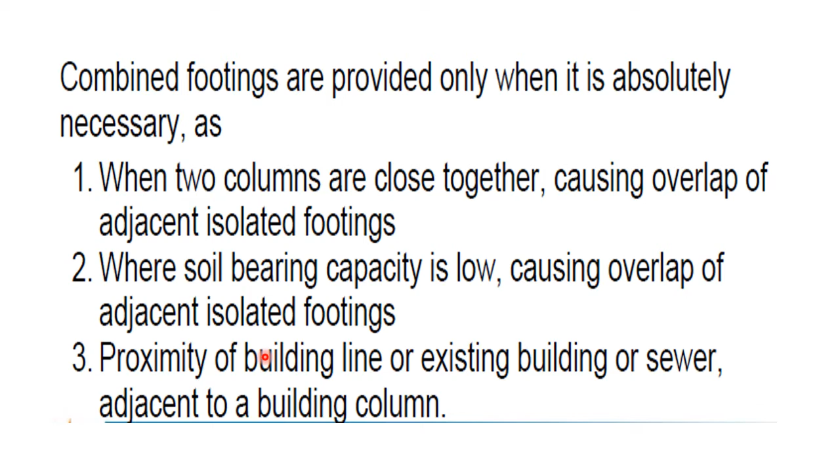And when the isolated footing area is large, it may go beyond our limit, beyond whatever border we have. There may be other constraints, such as sewers, where we cannot provide separate footings. In such cases, we go for the combined footing.

Now, based on the loads coming on the columns, the shape of the columns, and the position of the columns, we provide different shapes of combined footing. It may be rectangular if the loads are uniform, or trapezoidal if the loads on the columns are different—more area and length is provided to the column with higher load, and less to the column with less load. Or you can even go for a stepped kind of footing.

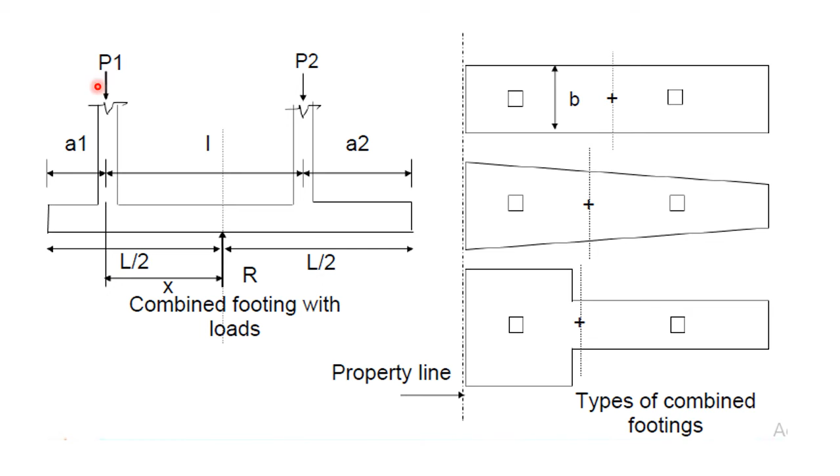Similarly, there are different ways of providing the combined footing. The first way is the slab type, where we connect the footing with the slab. This is not recommended because the thickness as well as the dimensions become larger and larger, so usually this kind of footing is not used.

The second one is the slab and beam type. This is most recommended. Here we provide a slab at the bottom, and the two columns are connected to each other with the help of a beam. So both the slab and the beam will be present below the ground level—this is the slab, this is the beam—and this is the most recommended type.

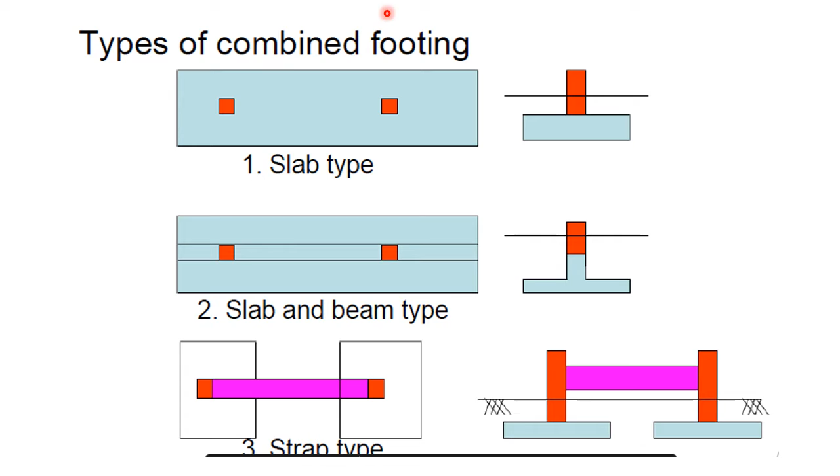Today, in the detailing of combined footing, we will learn the detailing of the slab and beam type of combined footing. One more type is the strap type, where two columns are connected with the help of a large depth beam provided above the ground level. So these are the different forms of combined footing.

Now, based on the presence of moments, we decide where to provide the reinforcement. When it is a combined footing like this, there is tension at the bottom, so you have to provide tension reinforcement at the bottom. Here also there is tension at the bottom, so tension reinforcement at the bottom; whereas here there is tension at the top, so you provide tension reinforcement at the top. Based on this flexural bending, we decide the position of reinforcements.

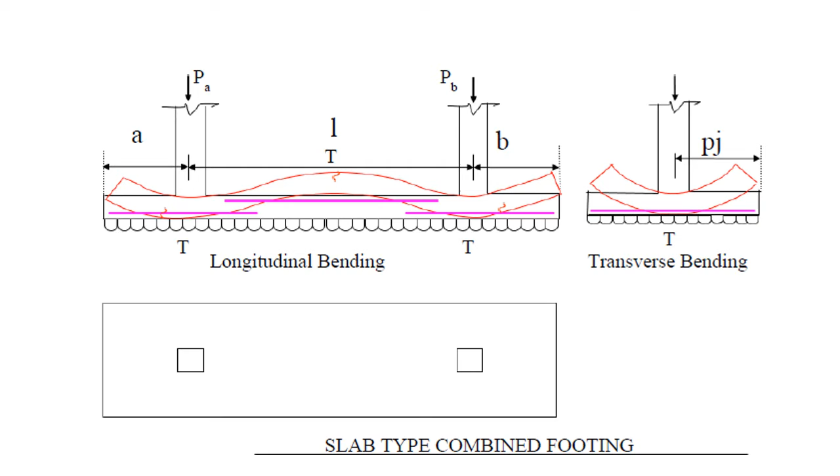Now, what I am going to do is, I have taken a problem and solved it. After designing the problem, I calculated the area of steel required, as well as the details of the reinforcements. But here we are going to concentrate only on the detailing of those reinforcements.

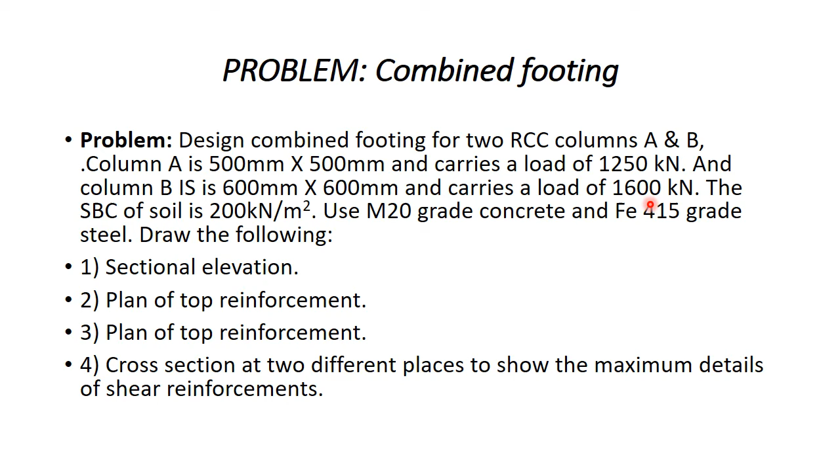So, I am designing a problem for a column A of 500 into 500 mm which carries a load of 1250 kilonewtons, and a column B of 600 into 600 mm which carries a load of 1600 kilonewtons. The safe bearing capacity of soil is 200 kilonewtons per square meter, M20 is the grade of concrete, and Fe415 is the grade of steel. For this, we have to draw the longitudinal section and show the cross sections of the beams and slab.

After designing the beam and slab type of combined footing, finally I came to know this is the total length of my beam and this is my depth of the beam. These are the column positions, and CA and BD are the cantilever projections. This is the arrangement of the combined footing. Since the load coming on the columns, as well as the dimensions of the columns, are different, the cantilever projections are also different, therefore this becomes an eccentric combined footing.

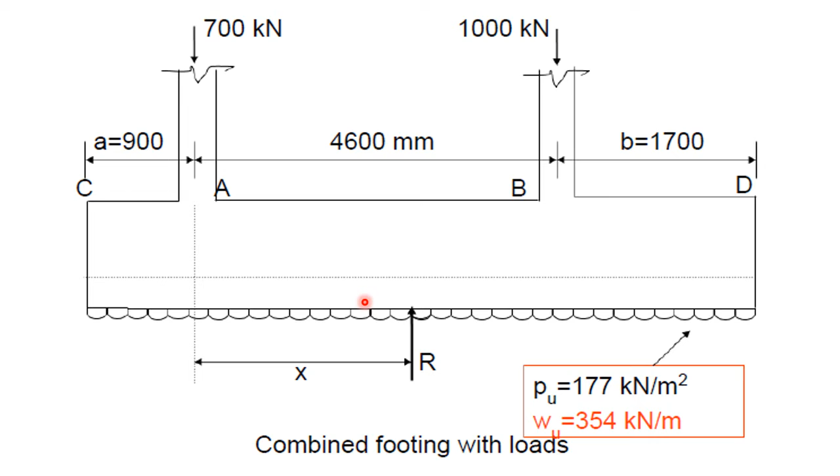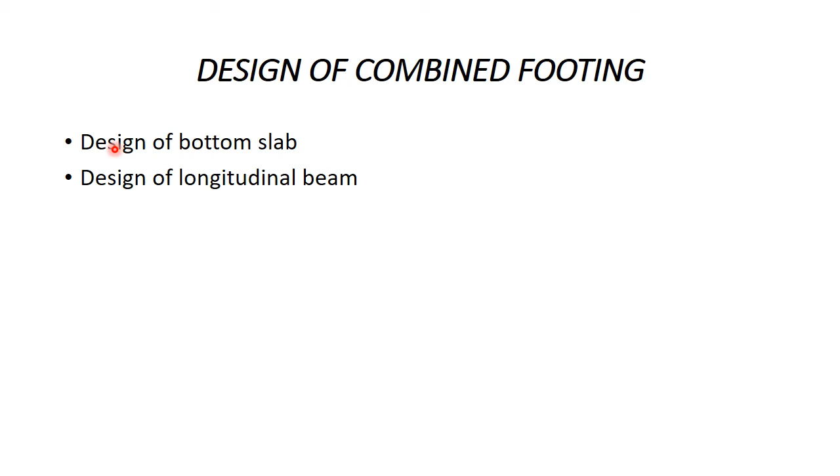As I already told, when we want to design the combined footing, there are mainly two parameters to consider: one is the design of the bottom slab, and the other is the design of the longitudinal beam. This longitudinal beam connects both the columns. Now we will go to the reinforcement details of longitudinal beams.

First we will go to the bottom slab. Already I have designed the bottom slab. Once I designed the bottom slab, I took the reinforcements. So I calculated what is the length of the slab, what is the width of the slab, what is the thickness of the slab. I calculated what is the area of the steel, and after that, I calculated the diameters of the bars that I have to provide.

According to that, I have to provide a 20 mm diameter bar at a spacing of 130 mm center to center - that is my main reinforcement - and an 8 mm diameter bar at a spacing of 160 mm center to center, which is my distribution reinforcement. This is my main reinforcement, this is my distribution reinforcement. In the next slide, I will explain the detail.

Once the slab is done, then we go to the beam. In the beam, I am going to provide the reinforcements as per the portions. First I will consider the cantilever portion BD, which is present to the right side of the combined footing. For that, I have to use 3 bars of 32 mm diameter and 4 bars of 16 mm diameter at the bottom.

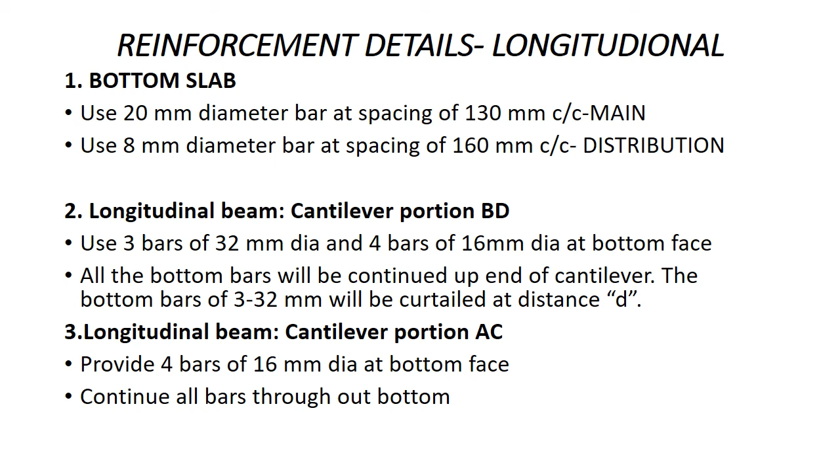You see this is my bottom slab. The total length of the slab is 7200 and the total width is 2000 mm, and this is my beam. Now these are my main reinforcement, that is 20 mm diameter bar at 130 mm center to center, and these are my longitudinal reinforcement, it is 8 mm diameter at 160 mm center to center.

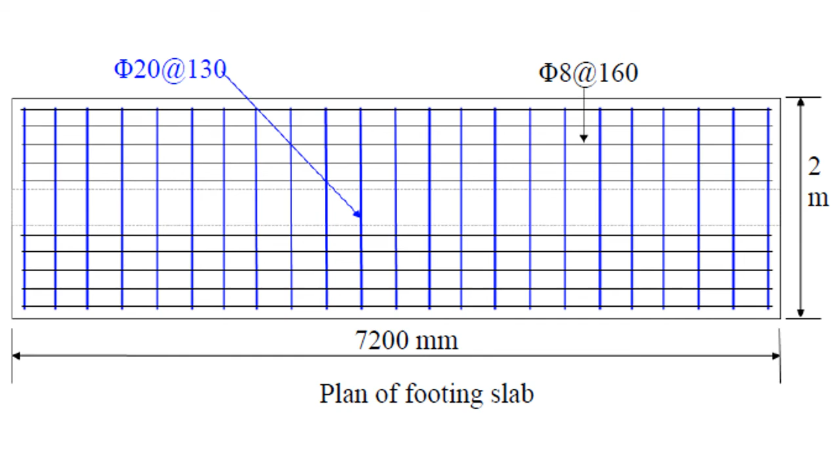Now this is my cantilever portion BD, this is my cantilever portion AC. I already told, in the cantilever portion there are 3 bars of 32 mm diameter and 4 bars of 16 mm diameter. The 4 bar of 16 mm diameter, shown in red color, is provided throughout the length of the beam. Similarly, even in the portion AC, there is only 4 bar of 16 mm provided throughout the length of the beam, but the 3 bar of 32 mm is not provided throughout the length.

It is provided only in the cantilever portion BD, as well as it is provided up to a distance D, that is the effective depth of the beam from the face of the column. So that is about these reinforcements. Okay, now after that.

Now for the top reinforcements, the total top reinforcement is 5 bars of 32 mm diameter and 3 bars of 16 mm diameter. Out of this, the 3 bars of 16 mm diameter are provided throughout the length of the beam. If you see everywhere, here it is 3 bars of 16, here also 3 bars of 16, here also 3 bars of 16 — it is provided throughout the length of the beam.

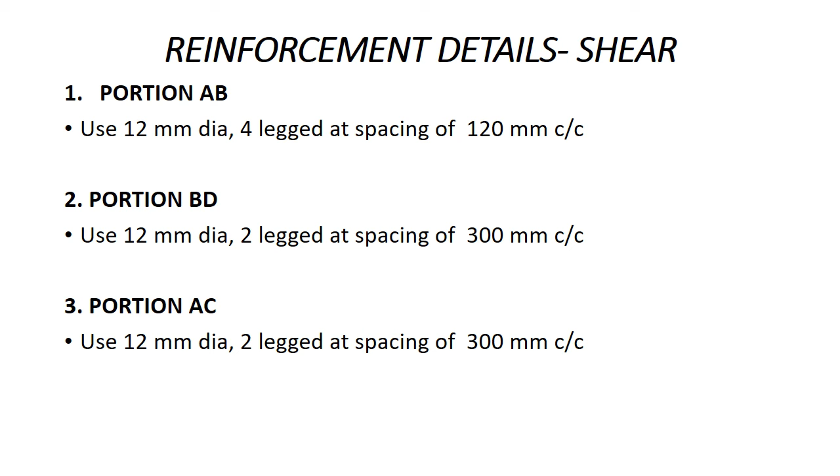Now when it comes to shear reinforcement in the portion AB, that is the middle, we are going to provide 4-legged stirrups at 120 mm center to center, whereas in the cantilever portions BD and AC, we are going to provide 2-legged stirrups at 300 mm center to center.

Therefore, if you see here, up to this distance it is 12 mm dia, 4-legged stirrups at 120 mm center to center. The remaining portion is 12 mm dia, 2-legged stirrups at 300 mm center to center. Even in the cantilever portion BD as well as cantilever portion AC, it is 2-legged stirrups, 12 mm dia at 300 mm center to center.

Now we will take two cross sections. One is exactly at the middle, another is exactly next to the outer face of column B. Therefore, if I take the cross section here, at the bottom I will be having only 4 bars of 16, whereas here I will be having 5 bars of 32 as well as 3 bars of 16.

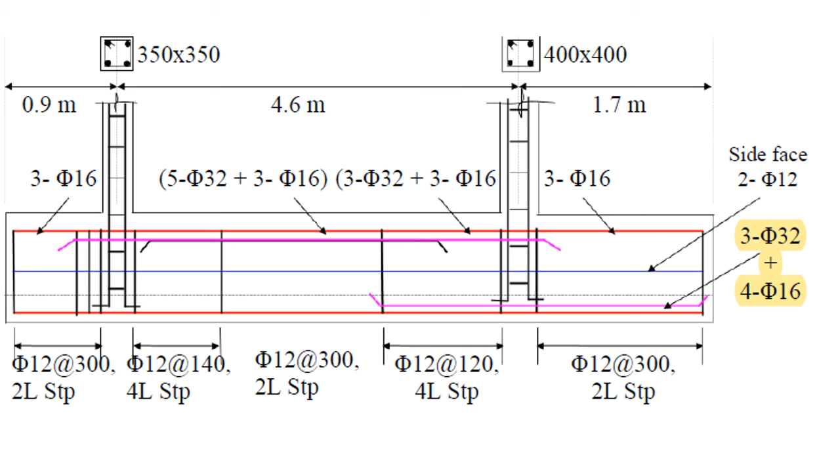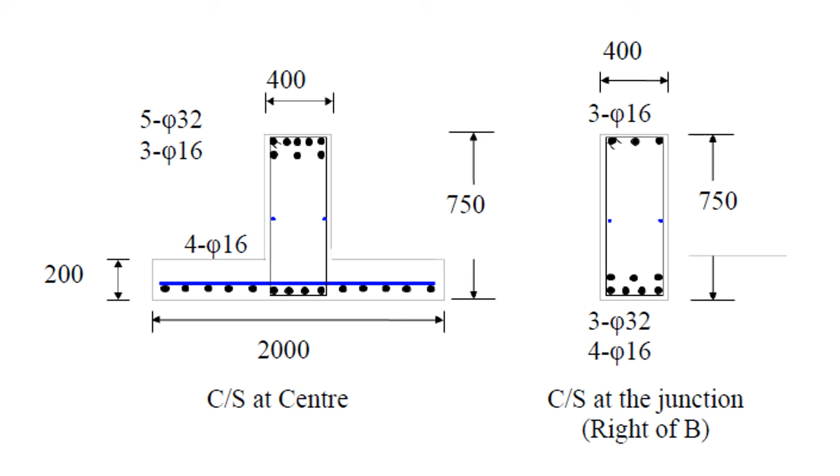And this is my slab, this is my beam. 400 is the width of the beam, 750 is the total depth of the beam, and 200 is the thickness of the slab. The one with blue color is the main reinforcement. This is the longitudinal reinforcement of the slab. Since it is 750 mm, we have to provide side face reinforcement, equal to 0.1% of the gross area of the beam.

So the drawings — this is again a slab drawn in AutoCAD. This is the longitudinal section showing all the bottom reinforcement, top reinforcement, and shear reinforcement. Two cross sections: one at the center, one exactly to the right of the column. So this completes your detailing of the combined footing. Thank you.